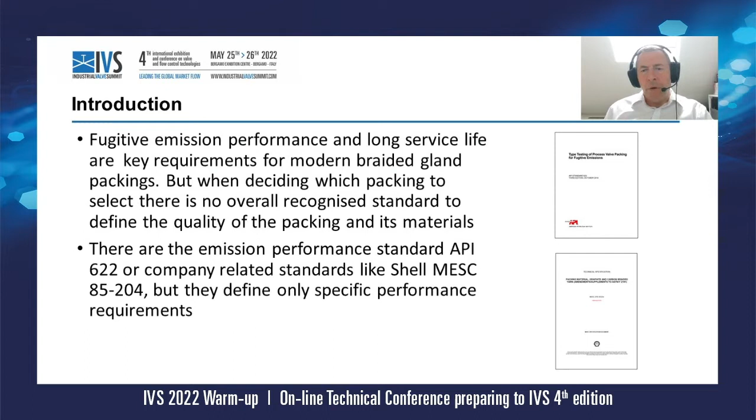The quality of a packing and its materials can guarantee a long service life and a good performance. But by saving on the seal costs, some low-cost materials might not meet certain quality standards and are likely to fail prematurely or suddenly. In this case, quite significant costs can arise due to product loss or downtime, as seen in the pyramid in the picture here. Also, other related costs like environmental or legal costs in case of personal injury or environmental damage can be quite high.

There's an old British standard in existence to define quality aspects of a packing material. It is BS 4371 from 1991. But this standard has not been maintained, is now very outdated, and it does not include modern packing materials. It even still describes asbestos materials which have long been banned in the European Union.

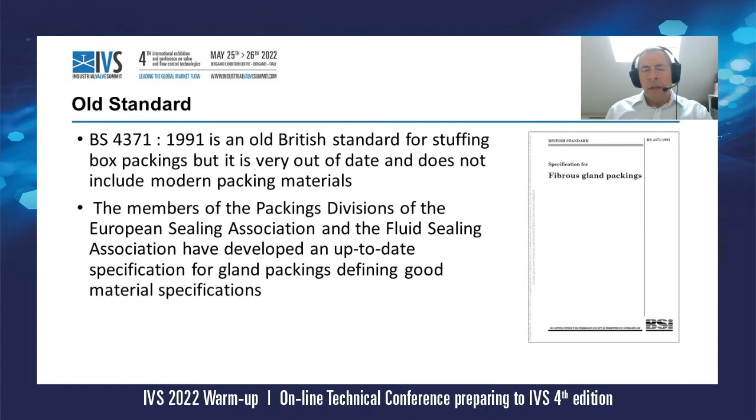The members of the Packings Division of the European Sealing Association and the Fluid Sealing Association have developed an up-to-date specification for gland packings, defining good material specification. In the following, I will give you more details about this new standard.

A specification for gland packings manufactured from yarns and ribbon has been developed by the ESA and the FSA over the last 3 years. Now the final draft for the packing material standard has been approved, and this specification provides a method of describing the materials, the impregnates and lubricants for various types of yarn and ribbon-based packings intended for use as gland seals in mechanical equipment such as pumps and valves.

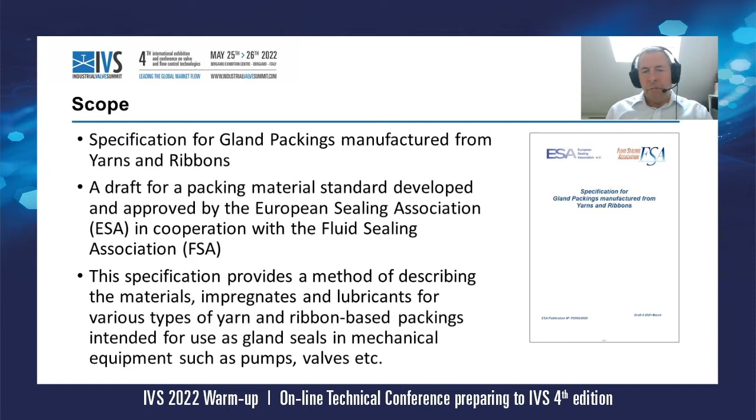In the synthetic fiber group, there are para-aramid, meta-aramid, acrylic, polyamide, novoloid, PPS, and PBI yarns. The PTFE group contains PTFE filament yarns, as well as ePTFE, ePTFE graphited, ePTFE graphited and oil, as well as ePTFE filled with talc and oil. The last group is the carbonaceous material. There we find the pre-ox PAN yarns, as well as the carbon and graphite-based yarns, and the expanded graphite yarns.

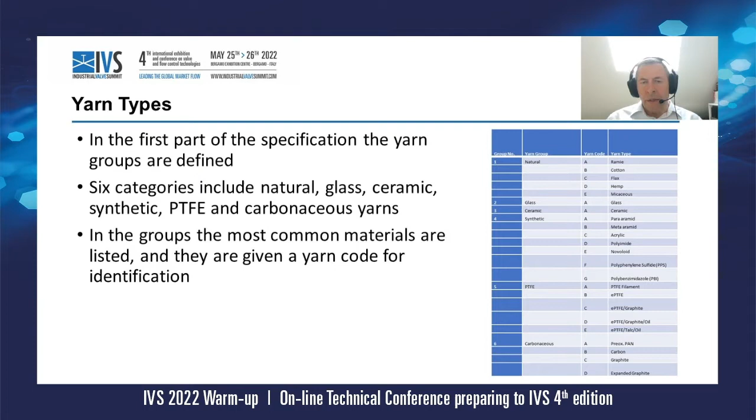In the next material group, the typical impregnants and lubricants used in packings are listed in a separate table, and they also receive an associated code. It can be basically that there's packings using no additional impregnant or lubricant, but the main ingredients added into a packing are PTFE, mineral grease or oil, silicone grease and oil, graphite and mica as impregnants or lubricants.

Additionally, the packing or the packing material can be also reinforced, and also for the type of reinforcement there's a separate table listed and coded again. So there can be no reinforcement, or glass, cotton, carbon, PTFE filaments, stainless steels, or Inconel can be used to reinforce the packing material.

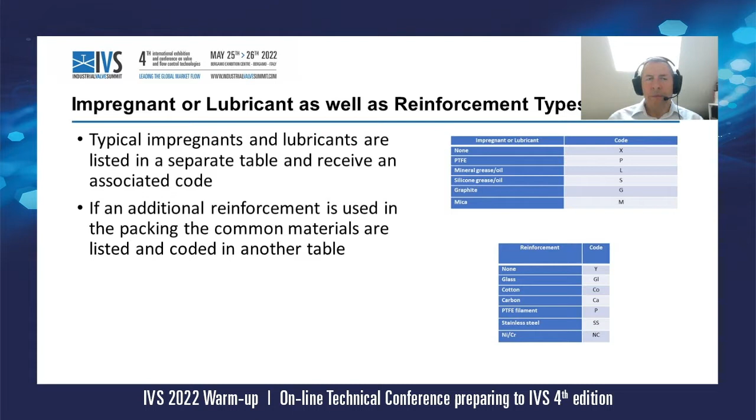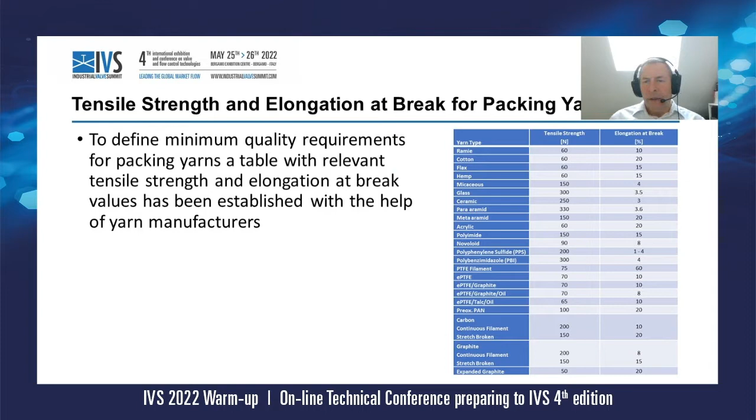Important characteristics for the good quality packing yarn are the tensile strengths and the elongation at break values. In the standard, the table has been defined with minimum values here with the help of yarn manufacturers to make sure that the packing yarns will perform and that the packing can be produced and braided without any problems, as well as guarantee that the packing will perform in the application under elevated temperatures as well as pressures.

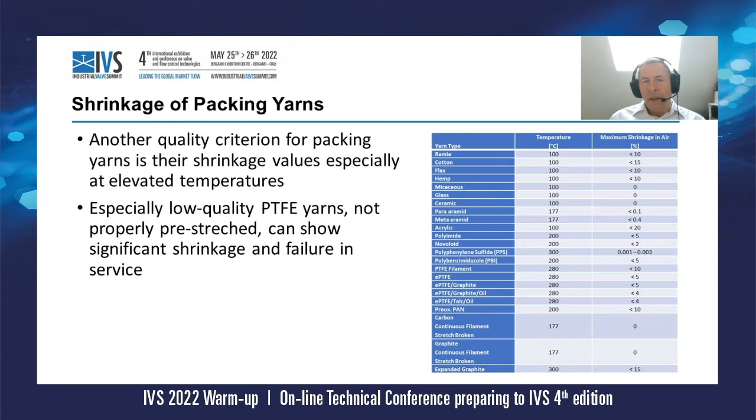Another quality criterion for packing yarns is the shrinkage value, especially at elevated temperatures. A table here has been also created with the help of manufacturers to show certain shrinkage values or maximum shrinkage values in air at elevated temperatures. Especially, for example, low-quality PTFE yarns, not properly pre-stretched, can show significant shrinkage and failure in service due to extrusion and related high gland pressure losses, but also with other materials which show high shrinkage, problems can occur and the service life will be shortened.

Another quality criterion for packing performance is the creep relaxation under gland pressure. Unfortunately, for specific packings or packing materials, there were no specific creep relaxation values available. So the packing division decided to run their own test, and one of our members is the company AMTEC Messtechnischer Service, who's specializing in testing of packings, gaskets, as well as valves. So we set up a test, and 16 of the most commonly used packing materials were defined and provided by different ESA members.

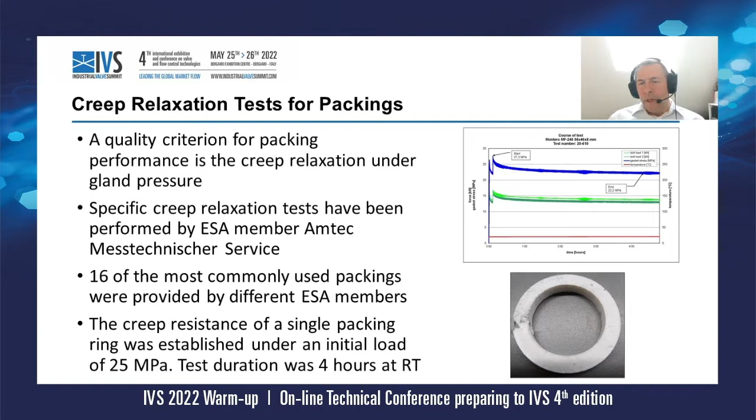The creep resistance of a single packing ring was established under an initial load of 25 MPa. The test duration and the holding time was 4 hours at room temperature. In the graph here you can see one of the test results. So the packing was submitted to the 25 MPa, then there was a short holding time, and then it was retightened to 25 again, and then the relaxation or the gland pressure loss over 4 hours was measured. And also after finishing the test and when the rings were extracted, the extrusion was checked.

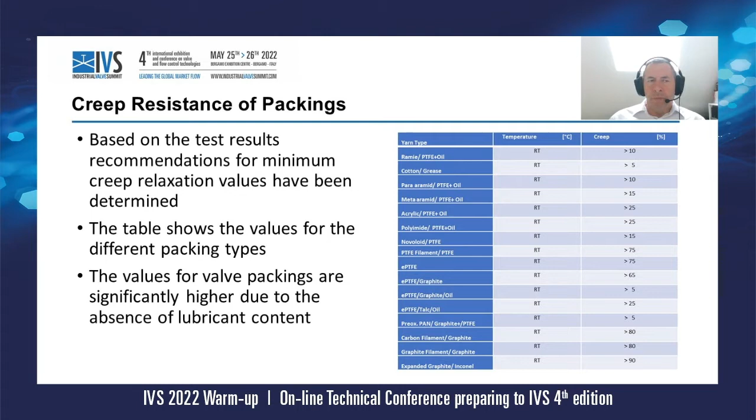Besides the specific values that have been shown in the previous slides, other criteria are also defined in the guideline. For example, for the pump packings, again, the grease, oil or binder content, because this shouldn't be too high, because again, a high amount of grease, oil and binder will give a quite high creep relaxation or volume loss, and the packing won't last that long in the application.

Then again, the dimension and tolerances are defined that a good quality packing should have, because that's important to install it without any problems. And also the packing density and tolerances are given, because again, certain density values for packing will make sure that sufficient impregnation is in the packing. Also, in addition, there are certain guidelines given for the packaging and the marking of the products, which is also important to protect the product and when it is stored to make sure that it will maintain its storage time.

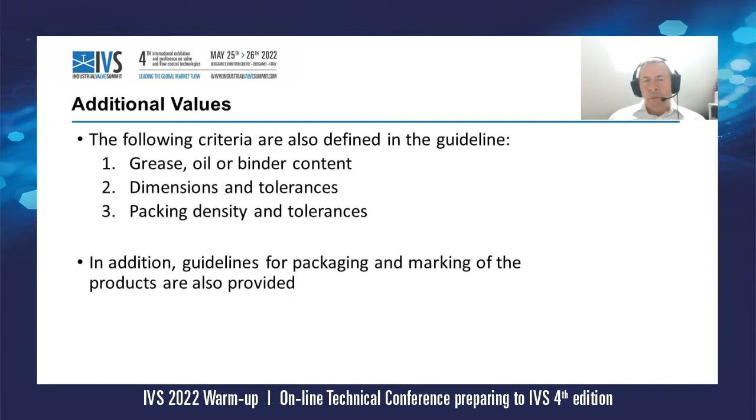Some of the packing criteria mentioned in the standard, international standards or guidelines are already in existence. They are all referenced in the document. But then again, we also produced a quite extensive appendix for test procedures that had to be defined to make sure that the quality standards can be met.

So the first one is the determination of the grease, oil or binder content, the determination of the size, the determination of the density, and again, the tables shown in the previous slides, the determination of tensile strengths and elongation at break of packing yarns, the determination of shrinkage of the packing yarns, and the determination of the creep resistance of the packings. They all have been defined in an extensive appendix, and the specific methods are given.

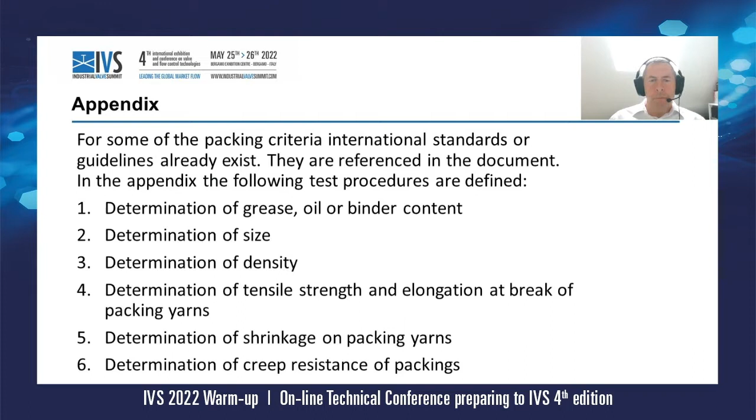To sum up, a new guideline to define good quality packing materials as well as packings has been established and approved by ESA and FSA packing division members. It has been forwarded now to CEN as a new work item proposal to establish an EN standard. We hope the proposal will be accepted and we can develop our draft then into a recognized standard which can be used to define good quality packings as well as materials.

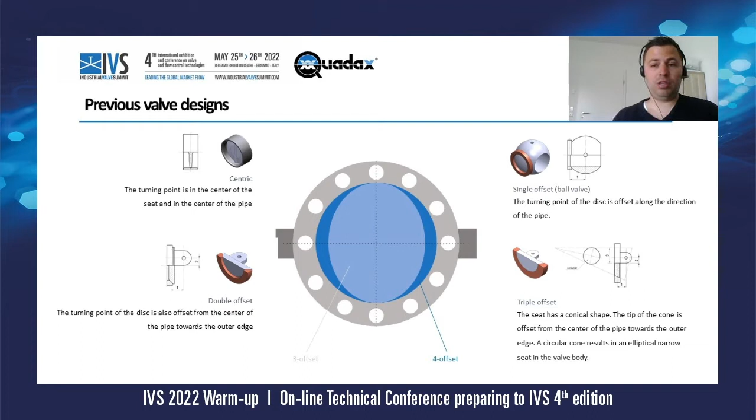A lot of people are asking what is behind this 4th offset, and that is what I quickly want to explain. I won't go over every one of those steps, but I want to show you the difference between the triple offset valves and the 4 offset valves, because in the end this is a big factor in the improved sealing technology that Quadax has.

So the conventional triple offset valve is what you can see here. There is a round output cone, which is turned to the outside. I show you with this little red tool that the clue of the triple offset valve is that we have on one side a straight side on the sealing area and on the other side an angled side. That was the very clever development that made it possible to design a butterfly valve with totally metal-to-metal sealing. Therefore, butterfly valves were able to go into higher demands, higher temperature ranges, and higher pressure ranges, which was not possible before.

These applications were solved with gate valves or ball valves, not with butterfly valves. But butterfly valves have the advantage of being very compact, coming in bigger sizes, and being less cost intensive. So this was a very interesting development toward higher demands. But how did Quadax come to the point of saying we develop a 4 offset butterfly valve? The reason for innovation is always identifying problems and trying to solve them.

The core problem was that we talked with a lot of customers in cryogenic applications, and they had issues with triple offset valves leaking in cryogenic conditions, mainly with high delta T values from ambient to cryogenic state, and this quite a lot of times.

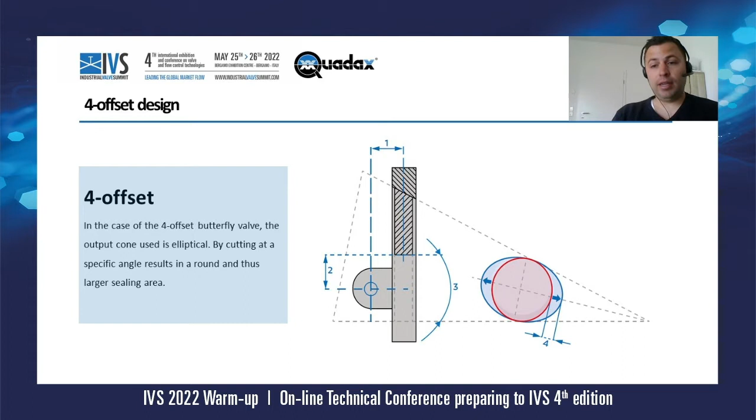So the goal of our innovation department, R&D department at the Müller Co-ax Group was to design a butterfly valve which keeps the structure of one side a straight side and one side an angled side, to reduce the friction to almost zero, but also have a totally round sealing geometry to have the same wall thickness all around and to be able to use totally round Inconel O-rings and sealing technologies. And Quadax did think about this.

So here's a video that shows you exactly this topic with a cone. Quadax had the clue of using an elliptical output cone and cutting this elliptic output cone under a specific angle. And then we received this totally round geometry by still having one side a straight side and one side an angled side.

So what are the advantages of this round sealing geometry? Higher CV values, totally friction-free design, lower driving forces, and therefore lower actuation, which is possible. And the result is that we have the highest tightness. We can work in extreme conditions. We have a homogeneous expansion and shrinking of the sealing material. We have the lowest leakage rate on the market with butterfly valves. We have the highest safety, and we do have a very cost-effective valve.

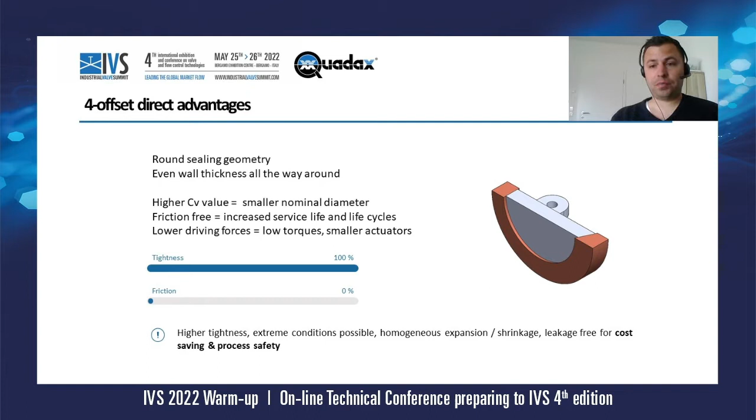To show you the official tightness ratings here quickly, we have the ISO standard 5208 or EN 12266-1. We do have the API 598. We do have the ANSI classes. And Quadax complies with the highest standards. So on the ISO side, we are rate A, no visually detectable leakage for the duration of the test. Or looking onto the ANSI side, we are even better than Class 6 because Class 6 is still allowing some sort of leakage.

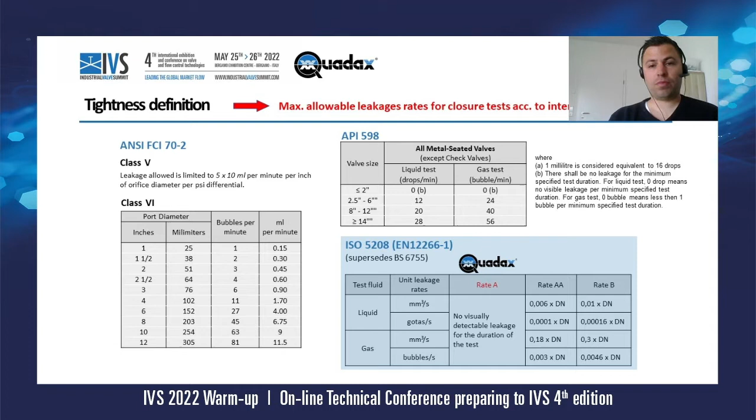And to give you some input that the design is proven and it's not only theoretical, I wanted to present you a success story of the biggest LNG terminal in Europe, because they literally had those issues with triple offset side entry valves that were leaking due to the cryogenic state and mainly due to the delta T, so to the cycling between minus 196 and ambient temperature. The customer required 42 cryogenic top entry valves, class 150 rated, sizes from DN80 to DN900 or 3-inch to 36-inch.

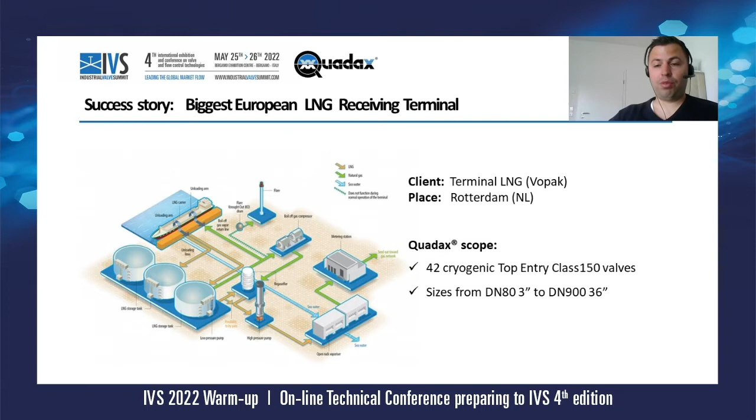And the best way to show you this top entry design, which application, what are the advantages, and about our testing, I show you our latest video for these cryogenic top entry valves. Here we go.

Quadax, made for the extreme. Outperforming top entry valves for LNG. Natural gas is often described as the cleanest fossil fuel. Therefore, the demand for LNG and its importance is steadily increasing for many countries that want additional sources for their energy supply. At LNG terminals, the imported liquid natural gas is unloaded from gas tankers in special berthing facilities at a temperature of minus 162 degrees Celsius and stored in large LNG storage tanks. Before it is delivered to the transmission network, the liquefied gas is smoothly warmed up and transformed into gaseous state. The valves are critical components at each stage of this process.

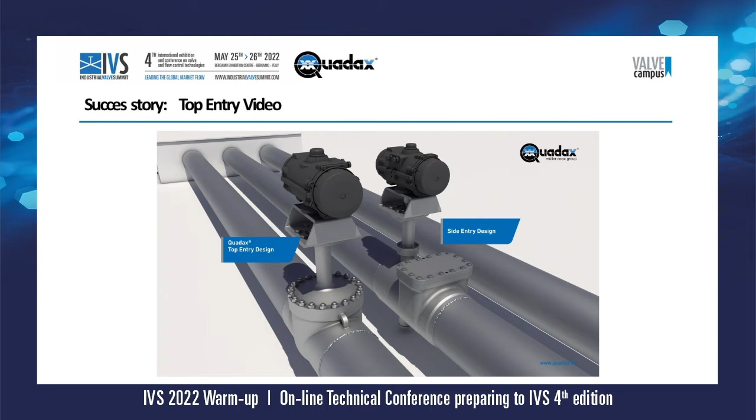The regulatory requirements are stringent, focusing on the specifications for welding connections in the pipelines. Cryogenic and high-temperature welded valves must be designed to enable maintenance of the internal components without removing the valve body from the line. Two solutions are available. Side entry design. Maintenance is difficult for sizes below DN 300, 12-inch. For large sizes, maintenance personnel have to enter the line to replace sealing components. The shaft bearings cannot be replaced without removing the body from the pipeline. Here, the trim cannot be extracted. Extraordinary safety measures have to be put in place.

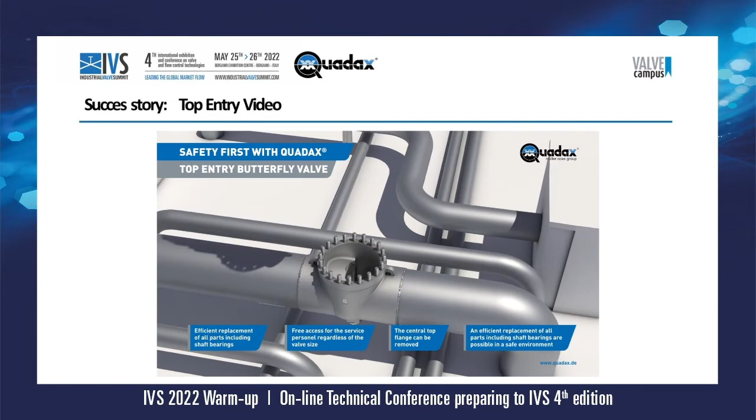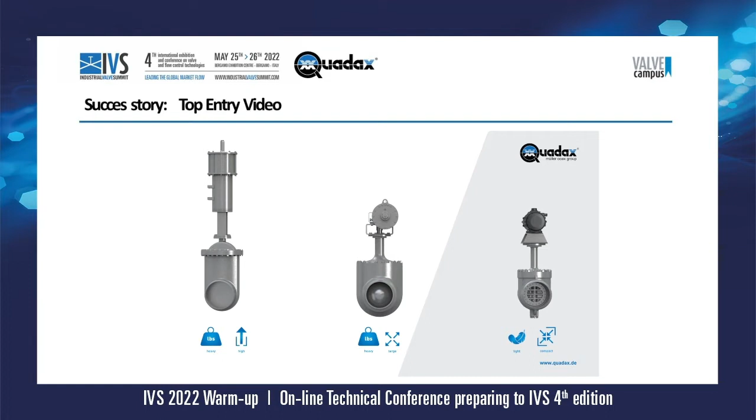Safety first with a Quadax top-entry butterfly valve. The central top flange can be removed and an efficient replacement of all parts including shaft bearings is possible in a safe environment, and easy access for service personnel is facilitated regardless of valve size. The Quadax top-entry butterfly valve is more compact and lighter compared to other valve types such as gate valves or ball valves. A drastic reduction in weight, especially for larger sizes and valves with higher pressure ratings, allows for simplification of the entire piping system and a subsequent reduction in the costs associated with piping supports. In contrast to the elliptical sealing geometry of a triple offset butterfly valve, the Quadax has a completely round seal.

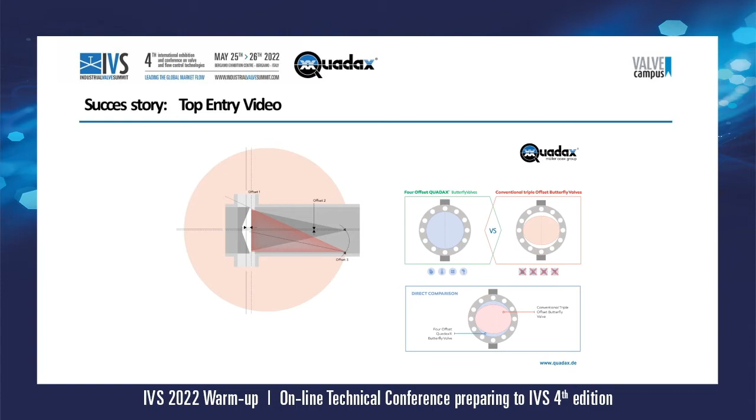Because of this innovative valve design, the Quadax valve has the following benefits: higher CV values, total round tightness seat, friction-free, has no wear on the sealing area during the closing movement, and a homogeneous expansion and shrinking of the sealing materials. This is the reason why Quadax is the most suitable design to handle easily extreme delta T and keep the tightness longer. Quadax outperformed in the most demanding test on the LNG market, which was based on the requirements of Europe's biggest LNG import terminal.

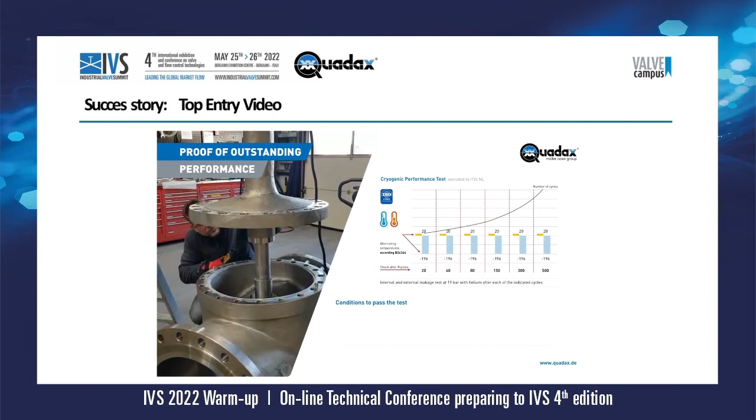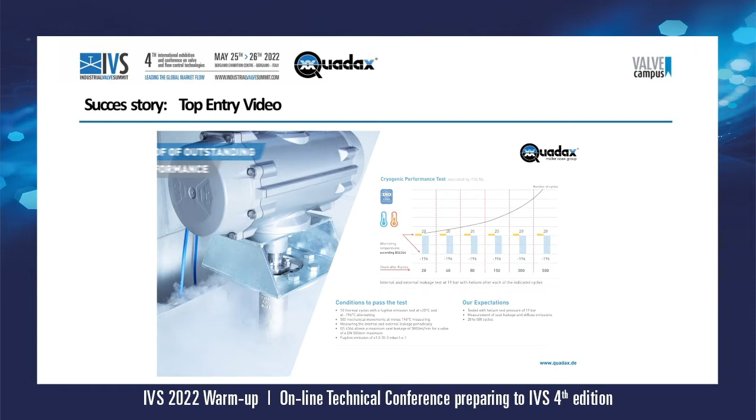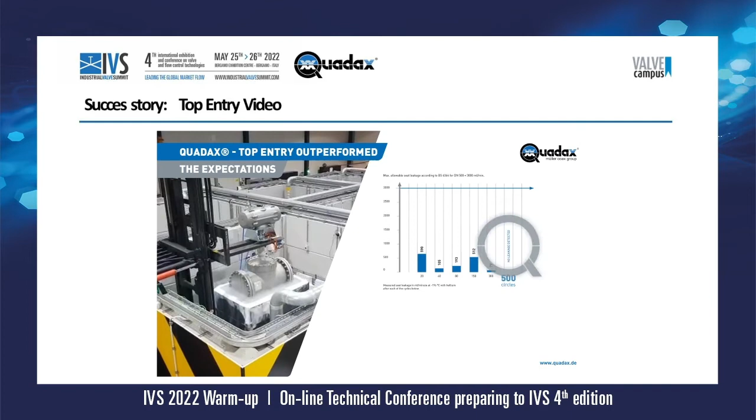The end user stipulated a test with 10 thermal cycles, combined with an endurance test with 500 mechanical switches. To meet this requirement, a Quadax 4-offset butterfly valve with the specifications DN 500mm and Class 150 was tested at the ITIS test laboratory in the Netherlands. The Test Institute ITIS BV certified that the seat leakage never exceeded the low value of 590 milliliters per minute, and after 500 cycles, zero leakage at all was detected. The fugitive emissions were well below the norm and hardly measurable.

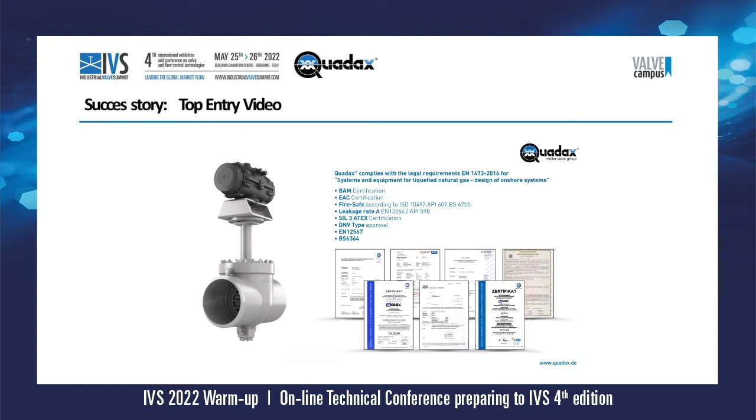The benefits in a nutshell: 100% tightness, higher CV values, meets international standards for approval, wide temperature range, reduced maintenance costs, safety for your staff, lowest fugitive emission on the market, lighter and more compact. The Quadax 4-offset butterfly valve excelled in the most rugged test in the market, outperforming industrial standards requirements, providing clear evidence of its quality and reliability in LNG installations.

Our innovative butterfly valves are produced in state-of-the-art, fully equipped 5-axis machining facilities. Quality, expertise and experience are the hallmarks of our production process to bring you products that are 100% made in Germany. Quadax top-entry butterfly valve with zero leakage in severe thermal cycle and endurance tests.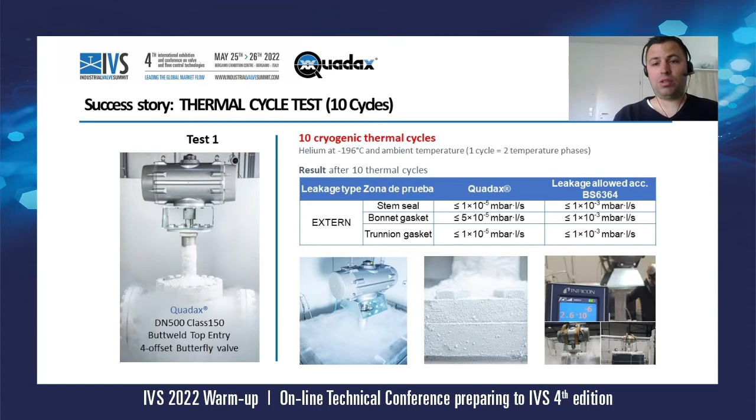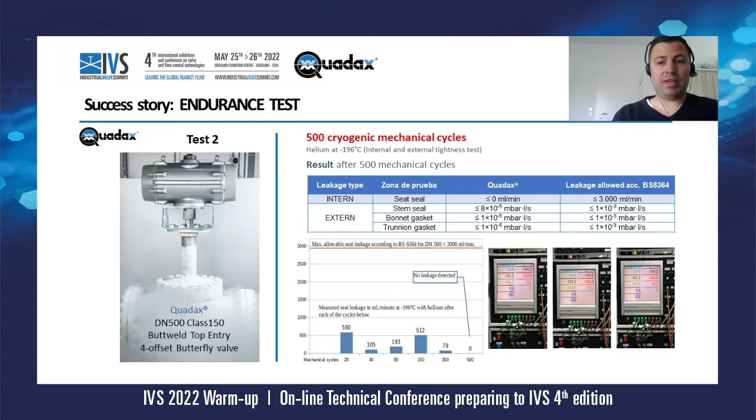The same thing here in the endurance test. You can see here on this slide the leakage rates, and you can see here on top the maximum allowable seat leakage rate according to BS 6364 for a DN500 valve. And you can see that the Quadax valves on the mechanical switches test were far below the limits, and at the end, zero leakage was detected at all, which was the best result that was ever achieved from a cryogenic butterfly valve. Here's some pictures of the testing in the Netherlands.

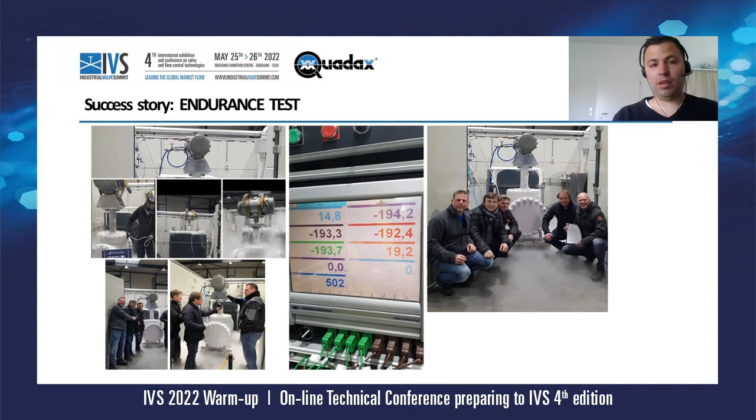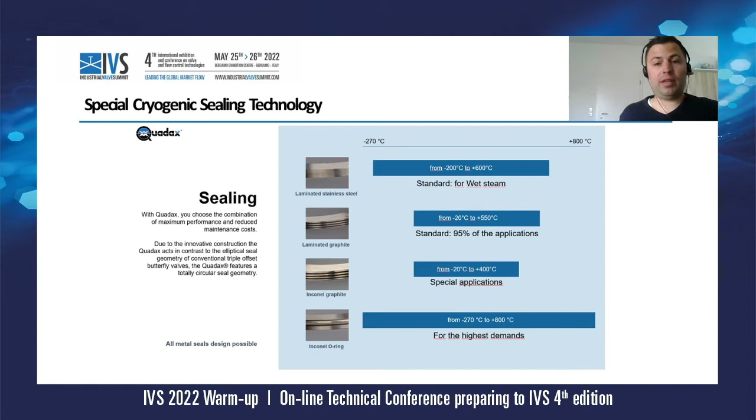And here a quick overview over our sealings, because we talk about sealing technologies here. For standard seals, Quadax uses laminated graphite or laminated stainless steel, depending on the application. And sometimes we have customer specific or designed sealing technologies, usually for the highest demands and also for these cryogenic applications that we're talking about today. We do use the Inconel O-ring. We can go from minus 270 degrees C up to 800 degrees C, and we can work with very high delta T's. We also do have valves installed for liquid helium applications in the aerospace industry, where our valves work perfectly at these very, very low temperatures.

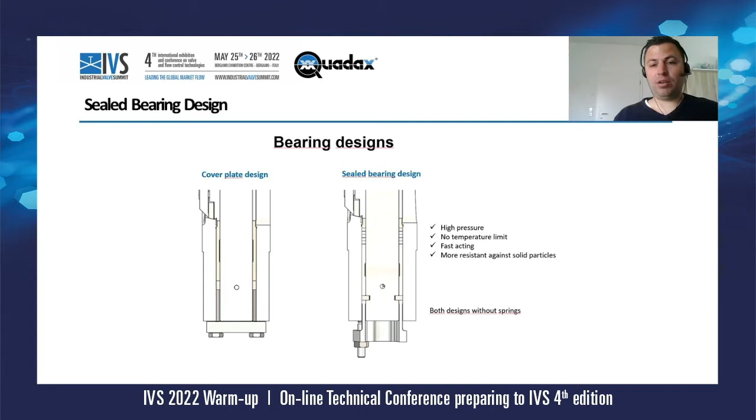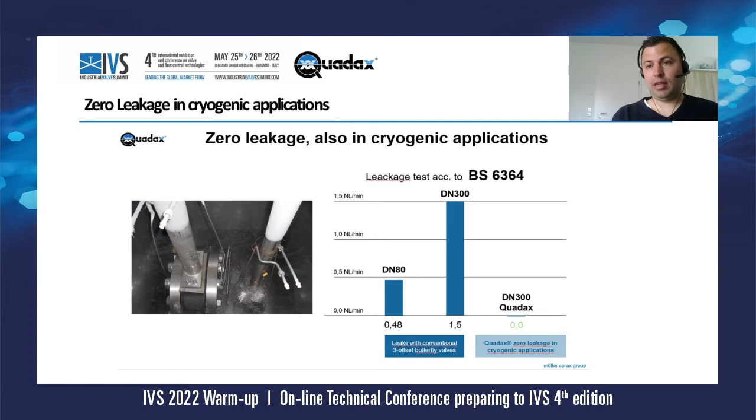So yeah, why Quadax? Cryogenic sealing solution, cryogenic applications. What is the Quadax solution finally? We do work with stainless steel, CF8M or CF3M materials, usually with welded valves, butt weld or top entry. We do have an Inconel O-ring sealing system, the packing fixed on the top of the extension. The valves are oil and grease free assembled, and we do work with shaft extensions, customer defined, depending how far away we need to bring the actuator from the temperature or from the valve.

And the main advantages are we do have a totally friction-free valve. We do have a homogeneous expansion and shrinking, even when it comes to high delta T values. The valve is basically maintenance-free, but even if maintenance occurs, we do have free access to all internal parts very easily due to our top entry design. We do have the highest precision in manufacturing in Germany, which gives you safety and the highest quality levels, and we can reach applications with temperatures below minus 250 C, as we can show and prove with liquid helium applications in the aerospace industry.

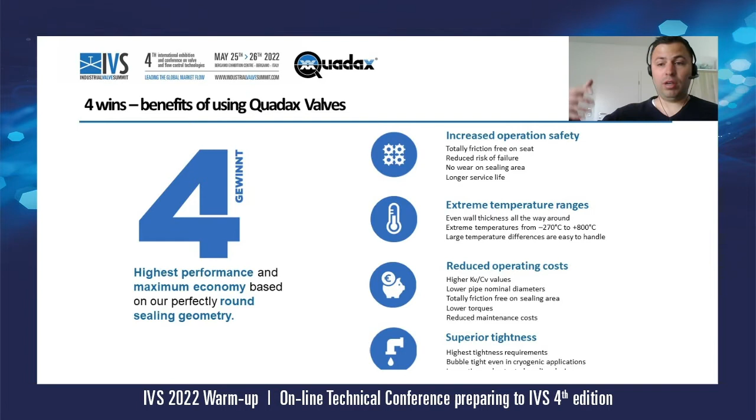A summary of the benefits of Quadax valves. Due to our valve, you will have increased operation safety. We can work with extreme temperature ranges. Due to higher CV values and lower actuation, we can reduce the operating costs, and we have a superior and longer tightness and more safety.

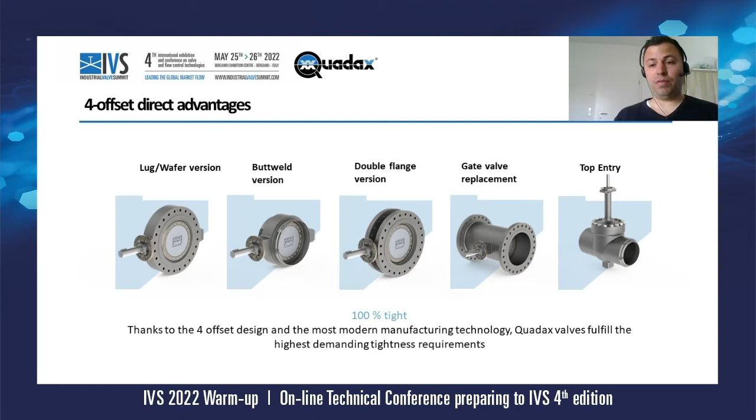We talked a lot about cryogenic applications today. Quadax is, of course, present in a lot of other applications with our valve. We work in power generation, district heating, technical gases, oxygen applications in air separation units, thermosolar plants, LNG, LPG systems, refinery, petrochemicals, everywhere where we need safety in severe applications. And there, Quadax is the best solution.

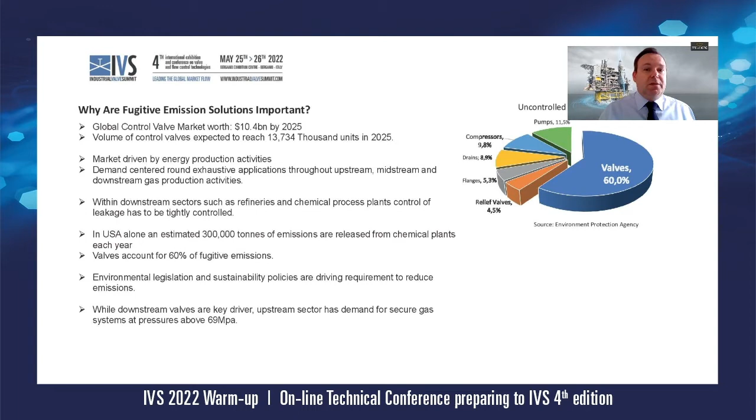Okay, so we know that this is an important issue and it's going to be a major consideration on future energy developments. But what exactly are fugitive emissions? These are any chemical in a physical form that can unknowingly leak from an installation or pressurized equipment, primarily from industrial processing or production facilities. And these fugitive releases contribute to air pollution, and depending on the gas involved, they can be very dangerous to any human personnel that are either operating that equipment or simply just working nearby.

And so as a result, all equipment within processing facilities can be tested for fugitive emissions by trained test engineers. And this can be done as part of an OEM assessment on equipment at manufacturing stage, as well as a monitoring program during service life. And what we find now is operators and OEMs will frequently ask manufacturers to provide a valve design that has been tested and proven to meet a very stringent level of emission.

And these can be tested using methane gas in line with the United States Environmental Protection Agency requirements, but can also be tested with helium gas, which has a much lower molecular weight and provides a much sterner test of valve capabilities. However, any valve has got to prove to be leak-tight within the pressures and temperature parameters it's designed to operate within, and leakage rate can be monitored in various ways depending on the standard.

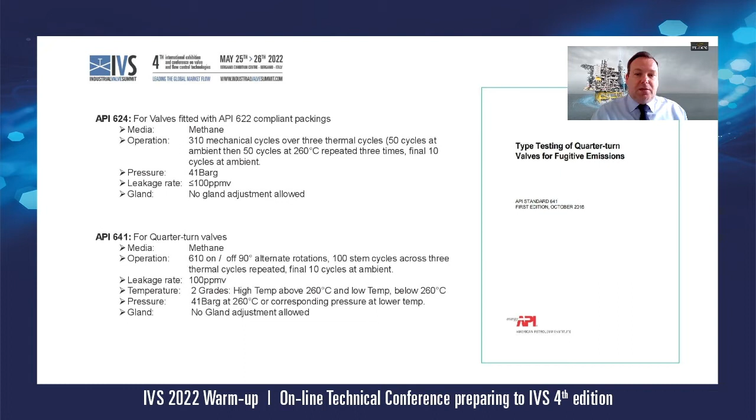First up is the American Petroleum Institute, and they have 3 standards for low emissions on valves. And these really are focused on low pressure downstream valves with prescribed testing set at ambient temperature, 260 degrees C and 41 bar gauge operating pressure. So that in itself gives us a good range of fugitive emission, low emission valves for one particular segment of the industry.

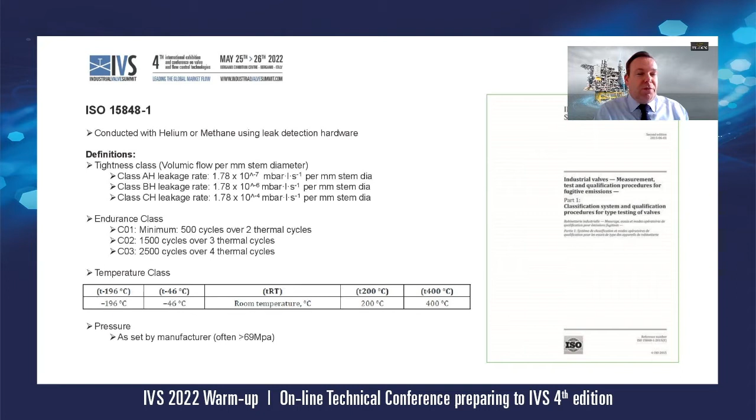Maybe more interesting for us would be ISO 15848, created by the International Standards Organization, which introduces a whole range of variables to the test data and is much more aligned with real applications that we see in upstream oil and gas, where we can test valves at much higher pressures and different temperature ranges, more in line with application conditions. So this makes ISO 15848 perhaps a more interesting standard and one that we want to align our products to.

So those are the standards we're looking to achieve. How are emission targets met currently? Well, there's a range of typical options used at present.

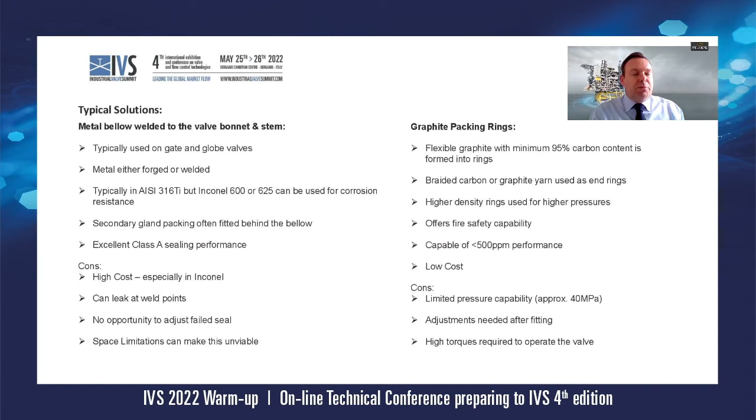So alternatively, engineered packing sets offer a viable compromise between bellows and graphite ring solutions. These are usually manufactured in an arrangement of PTFE or sometimes elastomer rings, supported by a high modulus thermoplastic material such as PEEK to prevent extrusion. And these components get set into the stem packing gland.

A spring energized lip seal can be utilized to preset the seal, and that allows the pressure to assist energizing the supporting rings while keeping low pressure sealing capability and also torque and friction levels to a minimum. By having multiple barriers behind the main spring energized seal, very low levels of interface leakage, the leakage between the seal lip and the hardware, can be achieved.

The resultant solution is adjustment free across many cycles. It's compatible with nearly all gas and chemicals and capable of operating at a very wide variety of pressures and temperatures depending on the design.

And typically engineered packing sets are suitable for Class B type leakage rate as per the ISO 15848-1 standard with a reasonable service life. But of course, there's very little test data in the market to support OEMs on designing and successfully testing these solutions for their low emission valve applications.

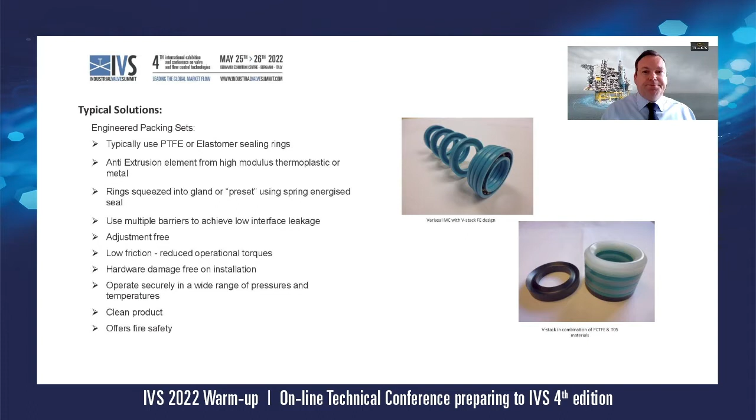And how are we doing that? Well, in order to begin putting together information for customers, we decided to start off following the API route of creating an initial fixture test to compare different stem seal arrangements in similar conditions.

And back in 2017, we completed the first upgrade of our testing capabilities, and that incorporated an electronically controlled environmental chamber matched with a purpose-built test fixture built along valve stem seal lines. This fixture allowed us to conduct comparative tests on a wide range of different arrangements across a temperature range of -50 to +150 degrees C.

But we did have some limitations, of course. First, the test rig only really allows for static tests on the seal set. And secondly, our pressure rating on the system was limited to only 150 bar. However, that still did allow us to screen test a lot of designs and analyze low pressure leak performance across the seal interfaces, which is a key concern in low emission testing.

The media selection was, of course, another area of discussion, and we opted for helium media as the preferred option, partly as it provides a more robust test of seal design, but partly because it's a lot easier to work with. A leakage rate target was another focus, and again we fell back on ISO 15848-1 and selected leakage criteria based on that.

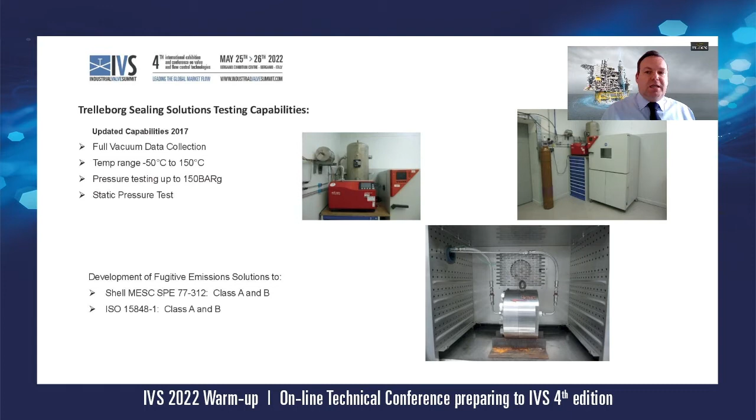As we're conducting static tests on this rig, we really wanted to achieve Class A leak tightness on an engineered packing set arrangement, if at all possible. And for measuring the exact leakage rate across the test seals in helium, we again looked at ISO 15848 and installed a full vacuum data collection system for much more precise data collection instead of relying on sniff testing as we've done in the past.

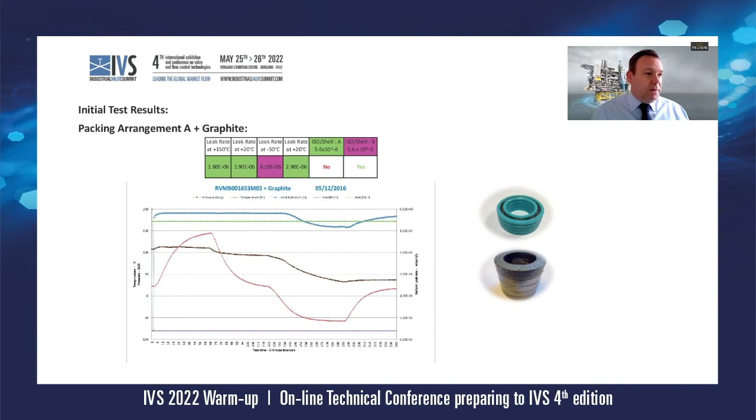And repeating the same test with the same green and purple lines representing Class A and Class B leakage rates, and the same brown bar for pressure and red bar for temperature. Our blue line is our actual leakage rate. We see that once again we have solid performance as the temperature ramps up to 150 degrees C.

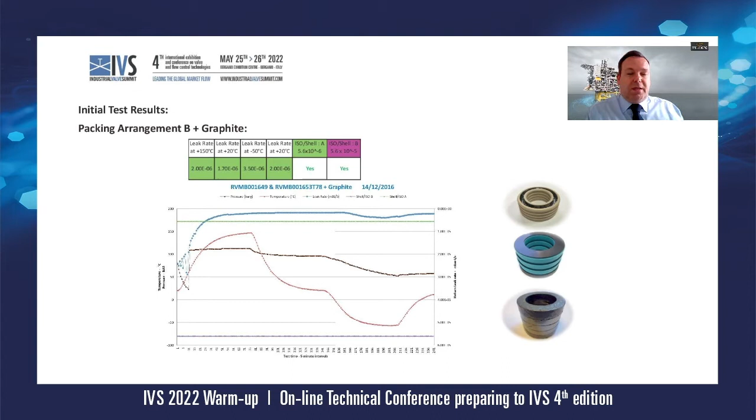And this demonstrated to us that engineered packing sets can achieve Class A leakage even at low temperature and pressure, given enough contact area and in the right conditions. Now, we were aware that our successful test incorporated graphite rings as part of the overall stem arrangement, and that did lead to discussions as to whether the graphite rings are doing all the work here, and whether we needed to repeat the performance without graphite rings.

And yeah, there might be times we want to keep graphite rings in the design, particularly on fire-safe applications, but the purpose of our testing was to prove an engineered packing set can deliver the performance that the industry needs. So to that end, we began testing several design iterations to the same conditions to achieve direct comparisons with our original tests.

And without going through all of the individual tests, our results demonstrated that multiple redundancy and increased surface contact provides really good seal performance, and all stack arrangements passed Class B level leakage rates. However, achieving Class A certainly required further development. And fitting higher loaded helical springs to our designs, as you can see on our first three seal stacks there, certainly was a good solution for increasing the level of interface force to achieve consistent Class A leak tightness.

But while this is great for a static test and a static solution, we're all too aware that this might not be as effective on a dynamic application where the stem's moving back and forth. These high load helical seals put a lot of torque and friction onto the design and would ultimately cause premature wear and leave you maybe not so better off.

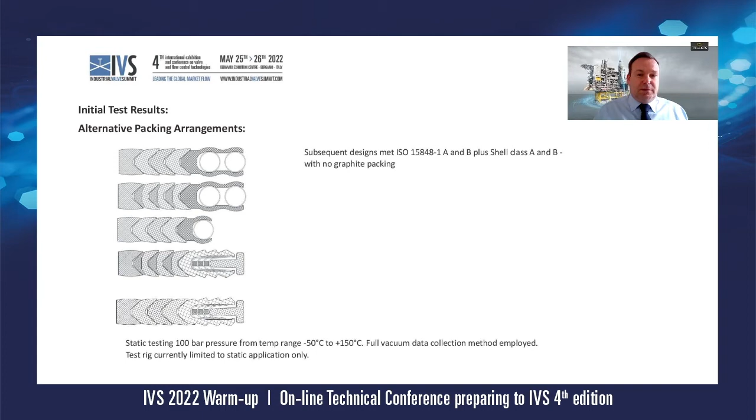And the summary at the end of our initial fixture testing is as follows: we certainly have a range of self-energized low friction stem seal arrangements capable of achieving ISO 15848-1 Class B leakage in typical conditions, and these can be supported by graphite rings if necessary. We also have self-energized low friction stem seal arrangements achieving ISO 15848 Class A leakage supported by graphite rings.

And now there are several options for achieving Class A leakage without graphite rings, given the right hardware conditions and a few other parameters that we noted during this test. And it's worth mentioning some of these, as they're definitely areas of concern and something that any valve OEM or anybody conducting fugitive emission testing should consider.

And firstly, the surface finish is incredibly important for achieving lowest possible leakage rates. And our best results were achieved when we polished our stem and groove walls to 0.1 Ra and achieved a bearing ratio in excess of 70%, as shown on the slide here at the bottom, with the optimum Rmr and lots of valleys in the surface finish and no peaks.

Excessive handling of components prior to installation also has an impact on performance. PTFE materials are very susceptible to scratches of fingers and nails over the sealing surfaces, and even the most minor running of the seal across the fingers can have an impact. So we recommend keeping components in original packaging right up till the final installation, and certainly recommend that you all resist the urge to pick the seal up and play around with it and touch it and handle it before it's put into the valve, as our engineers found out to their cost.

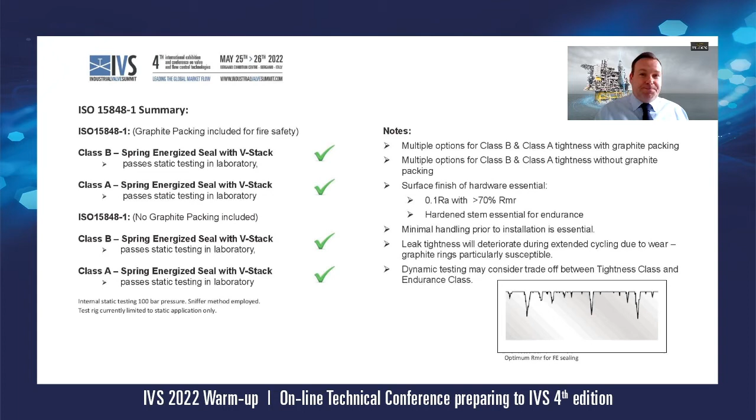So all the results shown so far, we know, represent static testing only. So we also think that an assessment may need to be made in relation to leak tightness versus endurance class for dynamic operation, because wear on the sealing interfaces will have an impact on the long-term leak tightness of that seal. And that brings us to my next area of discussion, of course, which is where we go next and what our next stage developments are.

So we are aware that we need to do more to replicate real conditions in an actual valve to prove durability and long-term effectiveness of our selected seal arrangements in real-life valve applications. And last year, we did a further upgrade to our existing test capability and added much more functionality to our stem seal testing. We've expanded our test vessel so it can take a slightly larger stem seal and different stem arrangements. We've attached an actuator to the rig, allowing for both linear stroke and a 90-degree on-off oscillation. And of course, the vessel is now capable of taking pressures up to 100 megapascals with a new gas booster installed to help us on that.

And a custom environmental chamber has been added to allow us to test at temperature ranges from currently approximately -70 to +250 degrees C. And this now brings our test criteria much more in line with actual conditions in valves across the upstream and production sector. So short of testing an actual valve, this is probably about as close as we can get. And we will be able to assess the impact of stroke speed, clearance gaps, and other valve type variables on the leakage rate and lifetime performance of the stem arrangements. And it will greatly enhance our ability to advise clients on optimum conditions for achieving a successful test within their own equipment.

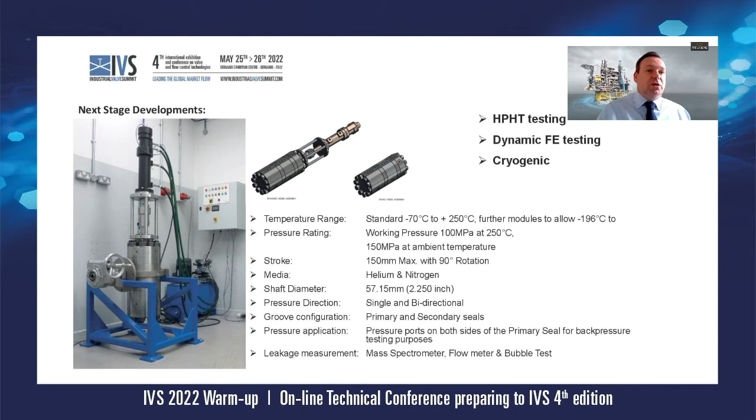So with that in mind, what do I need from you, as I said back at the start? Well, whether you are an OEM designing new valves for the industry, an operator looking to reduce emissions across all processing and production facilities, or even if you're involved with organisations such as EPA or in the EU, we want to hear from you. As I've shown there, we have many variables to low emission valve design and testing. We have limited resources. We can't test for every eventuality. Our testing will be limited to fixture testing, so we can't do a compliant ISO 15848 design in itself. Each valve needs to be validated independently and will likely be tested even in production. But we do want to provide the best advice possible and demonstrate the success of our designs in the right conditions. But the question is, of course, what conditions?

Should we be testing in helium or methane? Should we do linear stroke testing, quarter turn? Most importantly for us, where is the compromise between leakage rate and endurance class that best suits the industry currently and in the future? And what pressures and temperatures should we be looking to test that will cover as many of the applications as possible? We need to hear from you to ensure that our test program is as relevant for as much of the industry as possible and gives the best advice.

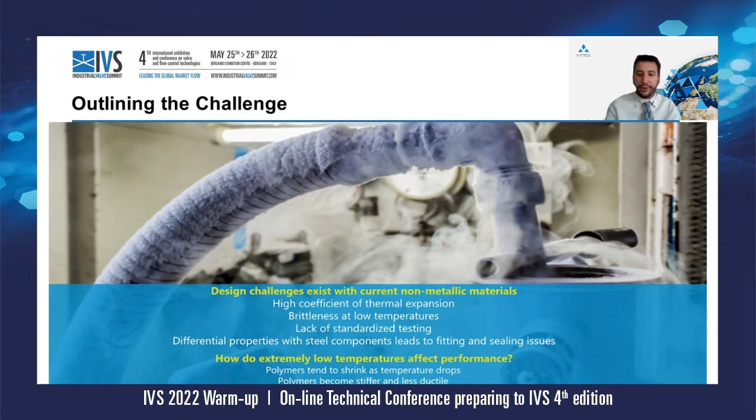So now, PEEK, as you know, is well established on the market and recognized as a material used typically for high temperature and chemically aggressive applications. And we know that for cryogenic sealing applications, PCTFE is the only material in use today, also modified PTFE, but definitely more for static seals or typically for very low pressure. So PCTFE is actually the benchmark.

The problem is that today, PCTFE is not anymore capable of covering the increasing range of temperature that the cryogenic valves are seeing. It's become quite common that the end user asks for cryogenic valves which work from -196 to even +200. And consider that 400 degrees is a huge, very wide range of temperature to be covered consistently. So PCTFE is surely a material that doesn't help reducing the torque. It's not cheap and it has certain limitations.

We believe that the market would actually benefit from a material capable of doing this. So extending the range of temperature, offering more reliable sealing, because sealing in cryogenic valves is very, very challenging, lowering the torque, and allowing cost saving. This is something we aimed for when we developed the CT polymers.

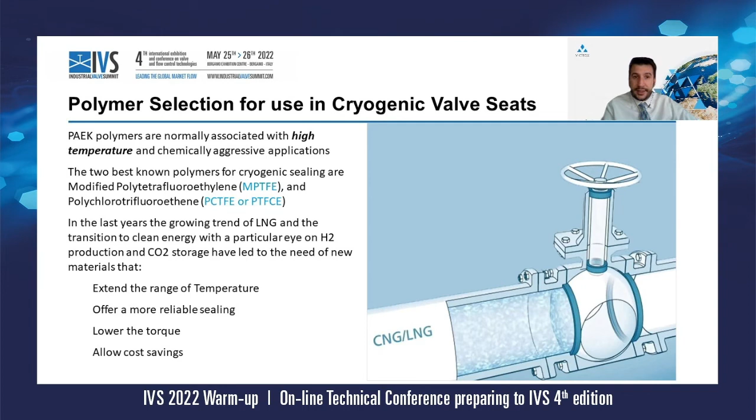So let's start with a deeper technical analysis. One important point I'd like to bring to your attention is that most of the data you will see are at -196 degrees. Why? Because this is where we need to evaluate the performances of sealing materials.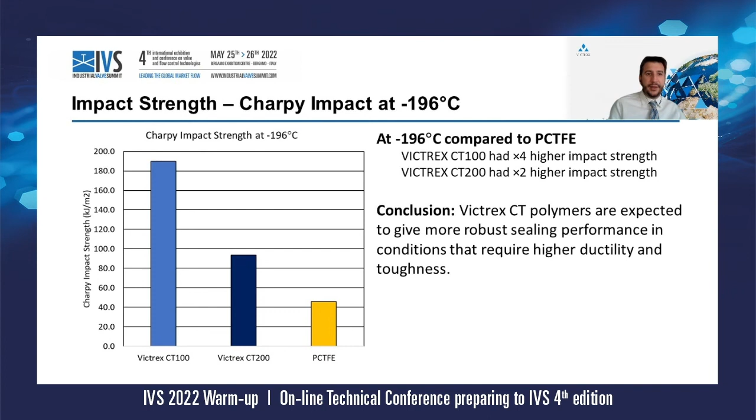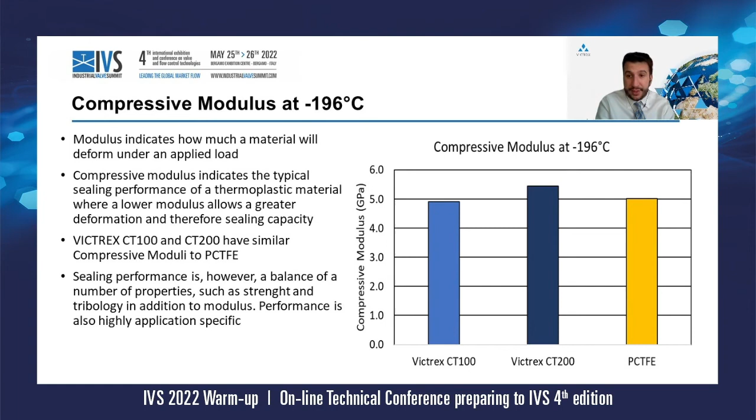Now, if we take a look at the compressive moduli instead, we will notice that the three materials are comparable. So we see how in certain cases we have values 2, 3, 4 times better than PCTFE. For other properties, like in this case, there are not big differences actually. However, as said, sealing performance is a balance of a number of properties like strength, tribology, and besides the mechanical, also the thermal properties. So let's start looking at the thermal properties as well.

In this slide is shown the second biggest advantage of using CT100 or CT200 instead of PCTFE. Both materials have in fact a lower and almost constant coefficient of thermal expansion, not only at very low temperature, but especially as the temperature goes up. The difference becomes more and more evident when the temperature goes up. The graph shows data only up to 50 degrees. The gap at higher temperature can only increase.

And we can stop the comparison around 100 degrees or maybe 120 degrees, where PCTFE is not even usable anymore, while PEEK CT100 and CT200 will continue to work properly up to 150, 180, 200 degrees, depending of course on pressure, with the same behavior you would expect from a common PEEK. So there are no changes to the expectations you might have at high temperature. The changes have been made especially to allow the performance at low temperature. So we refer to this when we state that CT polymers extend the temperature range of your cryogenic valves and reduce as much as possible any shrinkage or dimensional change.

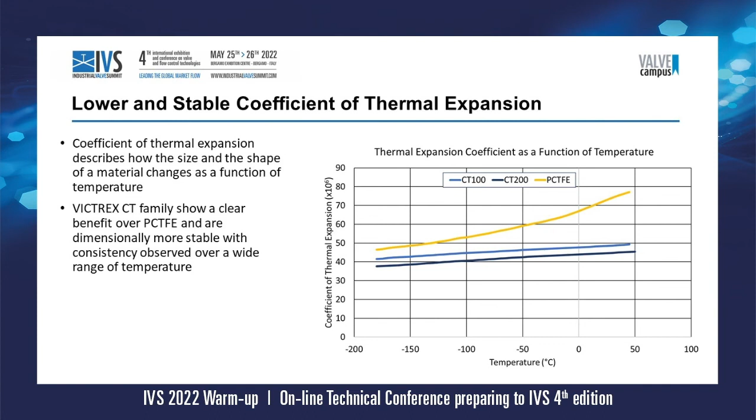Now, in the next slide, we take a look at another crucial thermal property, the thermal conductivity. The thermal conductivity for both CT100 and CT200 is higher. As we will never get rid of any dimensional change, what do we want? We want to reduce it as much as possible, but at the same time, we want it to happen as fast as possible. In fact, the reaction speed of a polymer changing dimension due to a temperature change is driven by its thermal conductivity. And the higher it is, the faster it will react.

So this simply results in sealing consistency, especially while the temperature is going up and down. Your seal will follow its metallic counterpart more rapidly than PCTFE would. And this helps to secure your sealing at all times. Again, while for the mechanical properties we have seen CT100 to be better, more ductile and more robust than CT200, regarding the thermal properties, CT200 is actually the best.

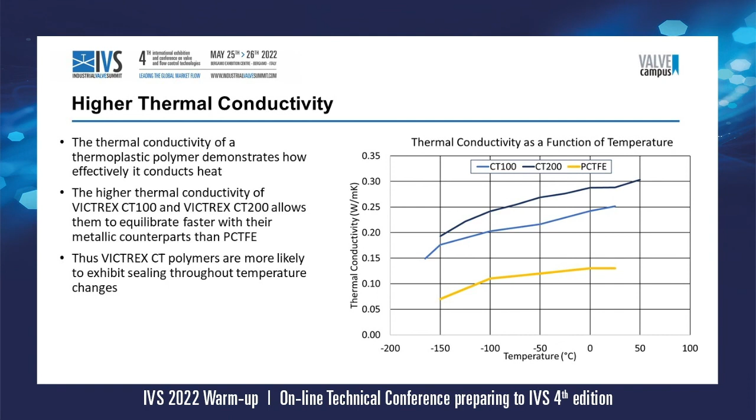And so it's here where CT200 comes to play a very important role, lowering the coefficient of friction, which means lowering the actuation force needed to operate the valve, which in cryogenic valves is often a challenge. We listened to our valve customers who were testing CT100 when it was released at the beginning, and they valued so much the mechanical and thermal benefits that this didn't stop us from improving more. On the other hand, it encouraged us to do more. And so we created CT200 in order to lower the torque and give the possibility to use a smaller actuator.

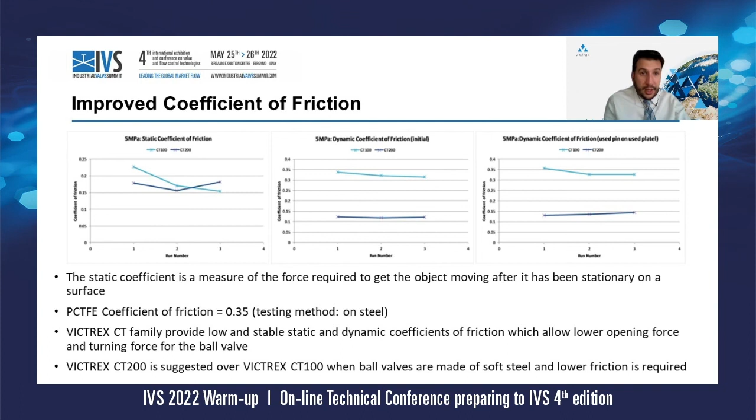After we released CT200, it was time to collect also data on its performances in the field, so on a real valve. So we have started cooperating again with our valve manufacturers and customers to make a comparison test on a real cryogenic valve, stressing the material as much as we could. What you see in this slide is a significant example of testing our material in one of the most challenging conditions.

Using a 10 inch top entry ball valve, class 1500, from minus 196 to plus 120. We couldn't go higher because there was a PCTFE insert inside, and PCTFE cannot withstand, as we said, temperatures higher than 120 maximum. And we made the test as per Shell MESC 77/300, which allows for very low leakage rates. And we have measured the leakage and the torque.

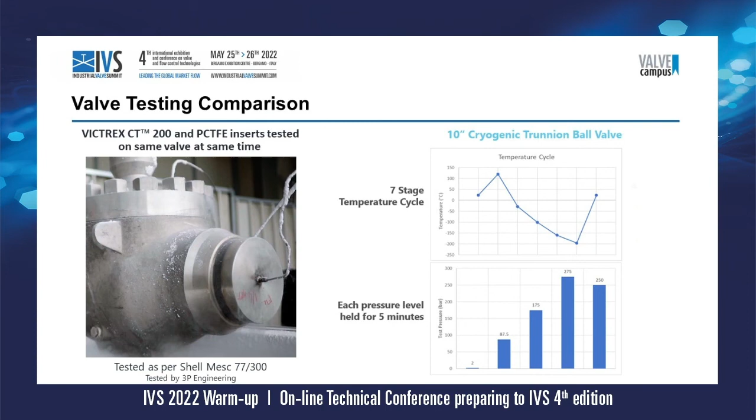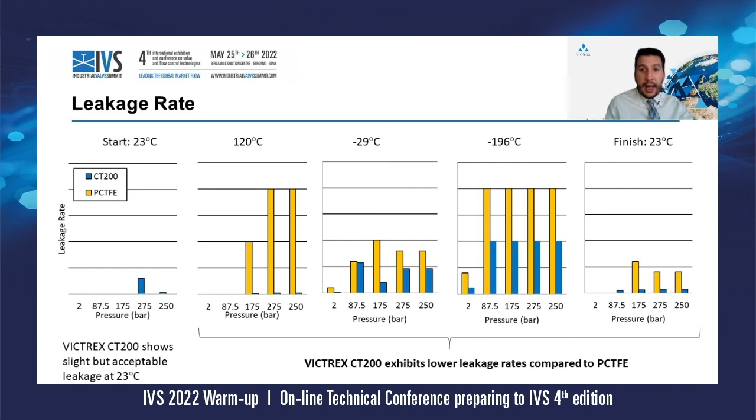So we have noticed during the test a lower leakage over the whole range of temperature at each pressure. So despite there was some leakage, it was acceptable from minus 196 up to 120. The tests have also shown that the torque on average was lower. So either at 2 bars or 250 bars, so low pressure or high pressure, if the torque given by PCTFE is at 1, all along the range of temperature, we had the lower values.

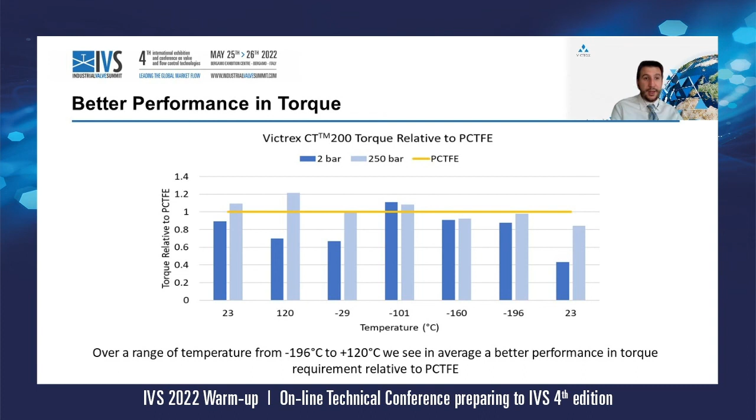So to summarize, CT100 has outstanding ductility and sealing capabilities with a great strength. CT200 has better thermal properties and a lower coefficient of friction. So when to use CT100 and when to use CT200, it's actually up to your needs. For example, if you look for outstanding ductility and you want to minimize the leakage as much as possible, probably you should go for CT100.

When you want to minimize the torque instead, because you know you can use a smaller actuator, you may choose CT200 in this case. So if you want to reduce the wear as much as possible, you might go for CT200. If you have already hardened your ball and you know wear won't be a big issue, you might go for CT100. So it really depends. You have seen outstanding mechanical properties for CT100, and you have seen even better than CT100 thermal properties for CT200 and the low coefficient of friction.

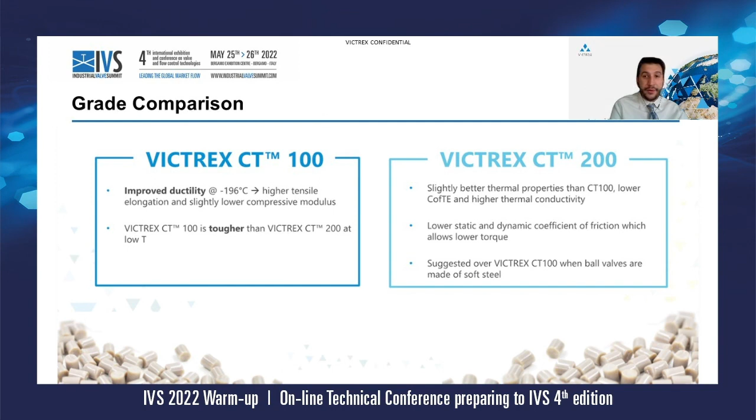If you have any questions, I will be more than happy to answer them.

Christian, here is your first question. You have mentioned the possibility for a cost saving. Can you better explain this point and quantify it? Absolutely. There are a few factors actually that should be taken into account. The first one is pretty much straightforward, and it's about the cost per kilo of CT polymers, which is in the same range as PCTFE.

But considering that CT polymers have about 40% lower density than PCTFE, you simply need less material to get the same number of parts. So, for example, if you have to buy 10 kilos for making a certain billet of PCTFE, you will buy 6 kilos to get the same billet and therefore to have the same number of parts. So this is a simple matter of fact.

Another one is more indirect, but not less important, and it comes from the better technological performances. So having a material which lowers the actuation force of your valve, the torque is lowered, of course. This might allow the valve manufacturer to use a smaller, so a cheaper actuator, so they can sell a cheaper system. Other things are still linked to the improved technical performances. Lower torque and lower coefficient of friction are likely to result in less wear or an extended lifetime, which is reducing maintenance cost. So that's why there is the opportunity for a cost saving.